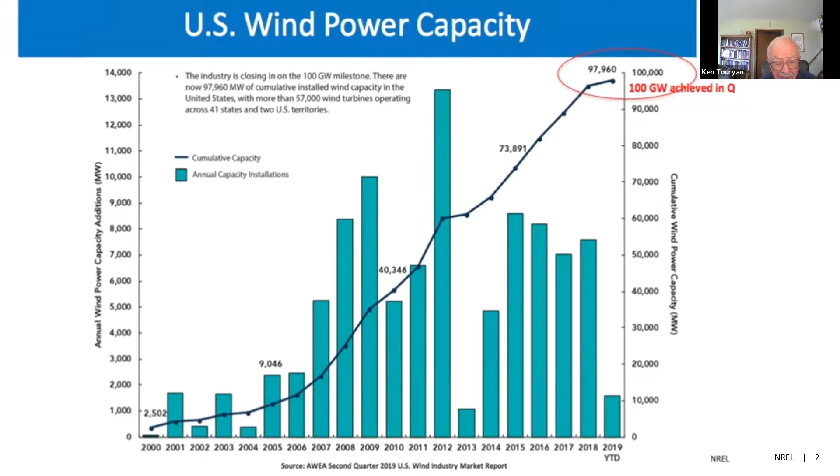In the following slide, I'll show you the vision that the Department of Energy has. The vision is wind energy could supply 20% of the US electrical demand by 2030. If you look at the lower left, it's right now 10%.

In fact, it is 10% in Colorado, our wind farms. But that's the vision toward which we're going, and it's accelerating so fast. I am sure we're going to even beat that by 2030.

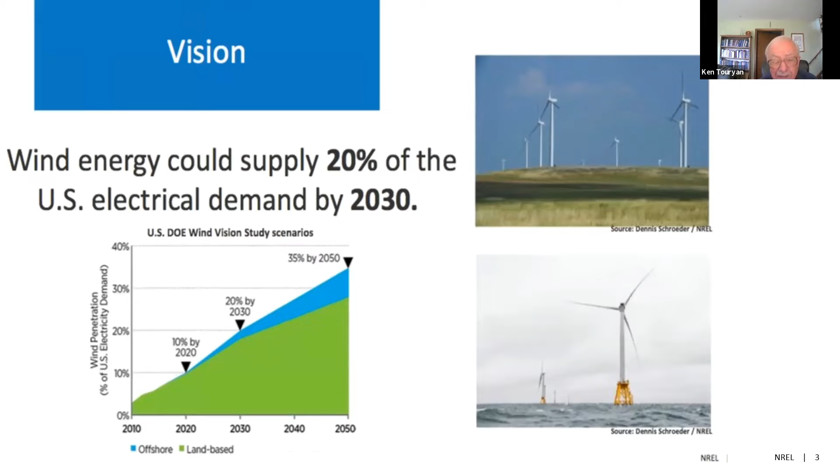On the next slide, we have the first offshore wind farm in the United States. The offshore is much more advanced in China than here. This is the very first one, which has been operating for 2 years. It is 5 6-megawatt turbines that provide enough power for 16,000 Rhode Island homes.

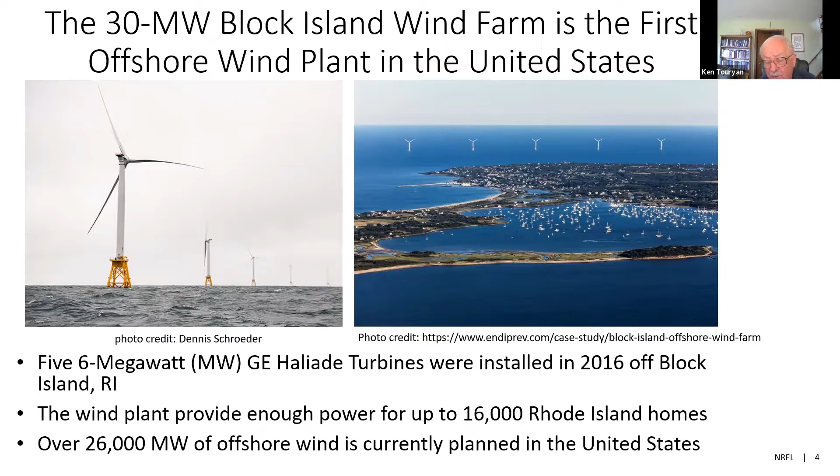This is in Rhode Island, and I'm going to show you what parts of the coastlines are best for wind farms. The next one being designed is in Maryland, the Delaware border, which will be 15 to 30 wind turbines, and it's just ongoing.

Okay, here is the very heart of the problem of wind farms in the ocean or in the sea. On the left-hand side, it shows you installed capacities of various countries. US isn't in there because we have only one so far. The fixed bottom is very simple. It's the floating that is the challenge. And there are 3 different types of floating systems, and I will come to that.

So far, 27,000 megawatts is installed in the fixed bottom, only 82 megawatts in the floating, and I'll describe to you a little more detail about those 3 floating techniques.

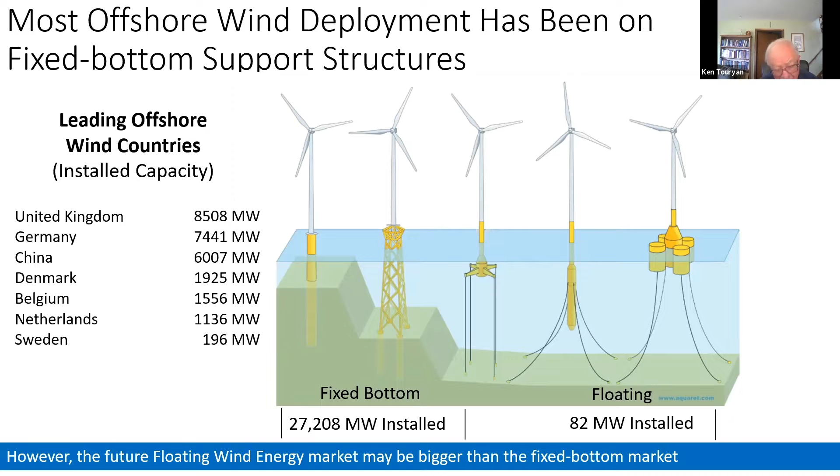Next slide, we will show the coastlines. There are quite a few coastlines throughout the world where you can go up to 60 meters. You don't go beyond that, it's too expensive. So unfortunately, 80% of offshore wind is past 60 meters, but there is enough that the floating systems can provide energy, especially by 2024. Incidentally, there's 57,000 turbines in the United States, but 90 to 95% of them are really onshore.

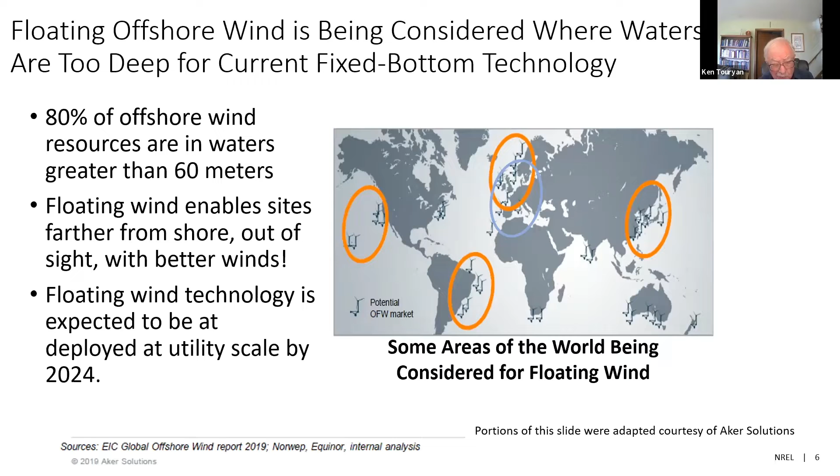Let's go to the next one. Here we will see the coastline for the United States. Notice that the northeast and the northwest are places where the wind is steady and high enough to make it cost effective. The key is 7 meters per second for wind turbine average, and then consistent wind that does not change much, and only offshore turbines can meet that criteria.

And then there's some in the south. The problem is you don't want to put wind farms where you can have typhoons or gigantic windstorms. It happens every now and then, but hopefully it will not be where you have a hurricane. So it's very important to keep that in mind.

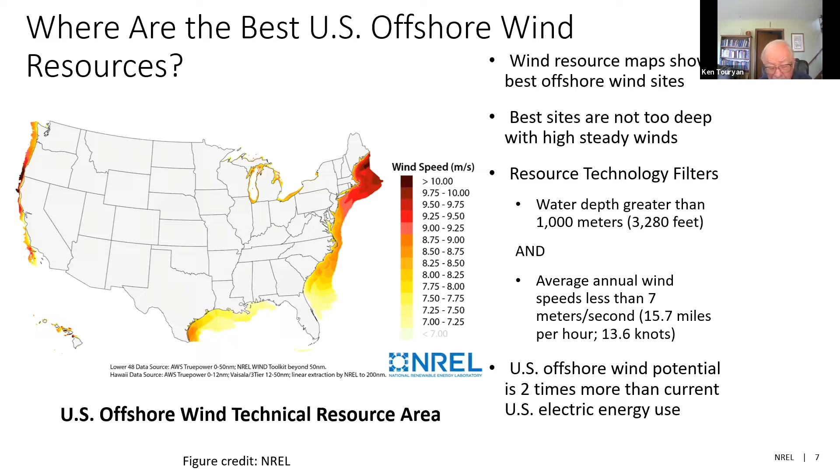All right, next slide. The very heart of the wind turbine is the blade. The lower one shows the 1980 blade. That was an airfoil. Okay, that has revolutionized now.

And we have very lightweight systems specifically for wind turbines. They're 90% lighter than the airfoil systems were. They have very interesting design features, which I don't have time to discuss, but I'll just mention a few things. In the Q&A, we can find out more.

The tip shape is tiny, and it's made like that to minimize noise, for example. The design and shape is specially done to reduce the torque of the blade, which in turn affects the generators inside the turbine nacelle. This one is the longest turbine blade that has been made, and it's all made of carbon fiber reinforced epoxy.

It is unfortunately not recyclable, because it is plastic-related. The most recent breakthrough has come, made up of vacuum-assisted forming of thermoplastic composites, which can be done in sections and then fused together. Fusion welding and adhesives are used.

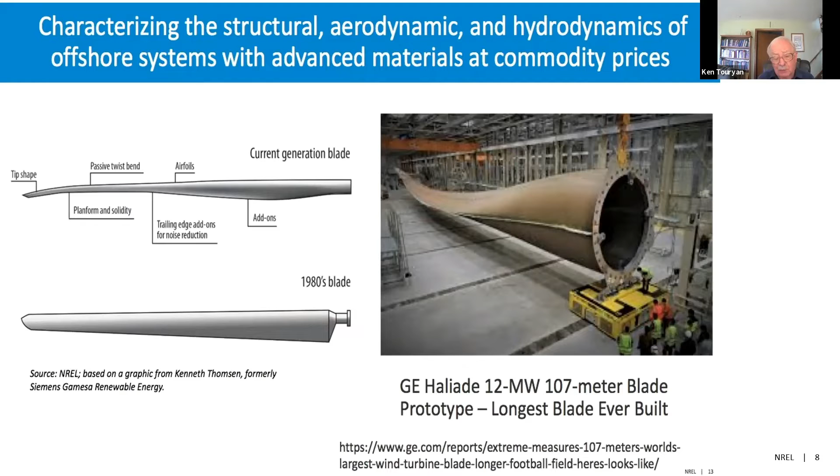They just tested it, and it looks good. And that's going to make the blade recyclable. There's a lot more information that I can give, but let's leave that for Q&A. Next slide is the heart of the installation.

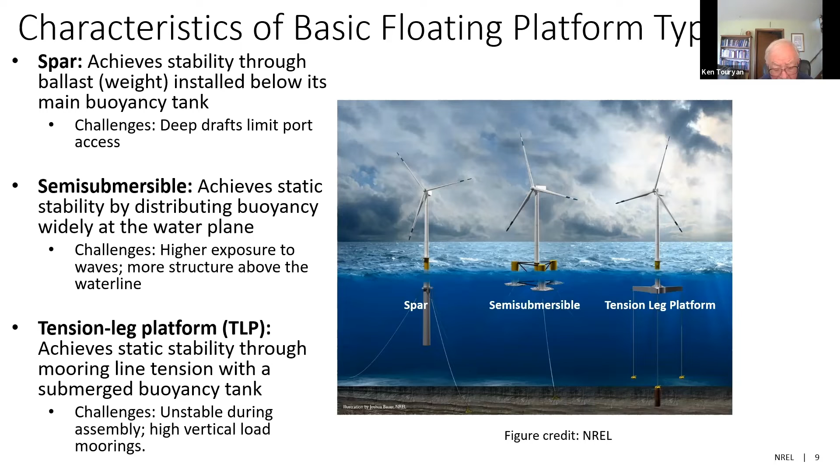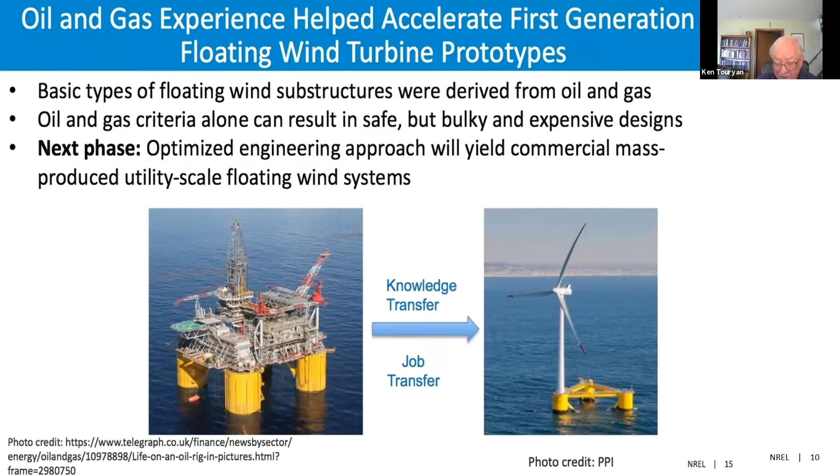In the next slide, we'll talk about a very interesting knowledge transfer from the oil and gas offshore rigs to the wind turbine, but it's limited because the wind turbine is top heavy, and you have a few different problems than the oil and gas system. Other than anchoring them, there's enough difference there, but it was a good start.

Next slide, I think we'll be looking at costs, which is very important. The turbine makes up only 24.3% of the total cost for a floating wind project. The blue side, you see, is also 26%. That is one of the biggest areas where cost can be lowered.

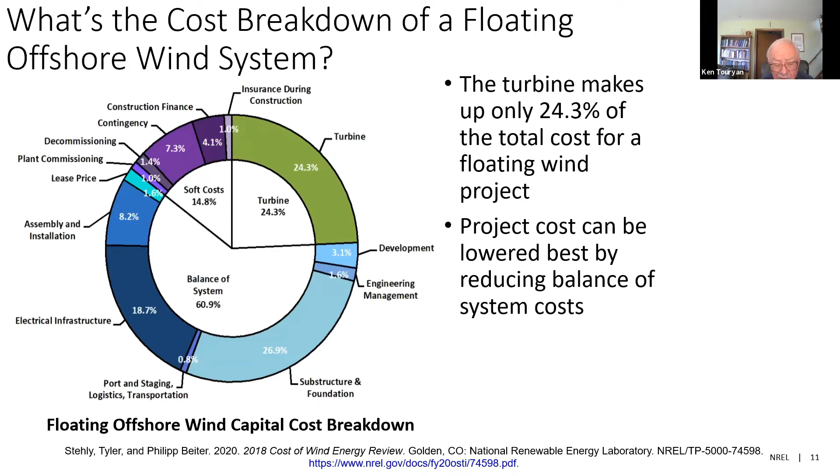That's where the installation is, the repairs are, moving the thing back and forth, and so on. That's where the biggest savings can be obtained as we learn more about how to install these in the sea, in the ocean. Next one.

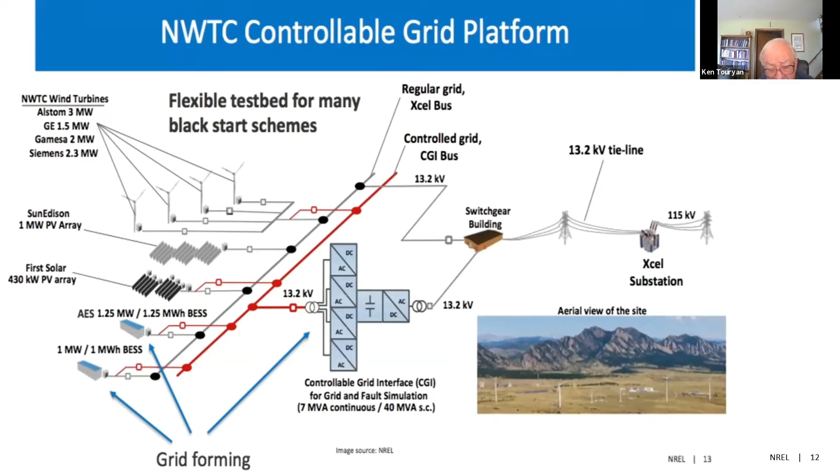Oh, I'm going to skip this. This is a very interesting platform NREL developed to help plan how you get a DC system, which is the output of a wind turbine, and connect it quickly to the grid. It's quite a technology to plan that. But let me skip that. Maybe we can recover that in the Q&A.

Floating operations and maintenance obviously is very important. If it is small repairs, as you see here, a tugboat can come, and then there is a lift that goes up and down in which small changes can be made. Some of these turbines are hollow, and you have an elevator in that, but that's expensive.

On the right-hand side, for major repairs, of course, you have a tugboat that has to come and a crane that will take off primarily the blades and also maybe the generators if something goes wrong, and bring it to shore. So that's where we have some of the interesting, more exciting problems.

In fact, I would suggest if you really want to know how they install these things and repair them, go to the internet. There you'll see some of the turbine manufacturers have a video for you to watch how they put this together.

When you erect these turbines, if it is less than 6 megawatts, it is done onshore and then carried by towed into place. If it is higher than that, then you need a special platform which the Chinese have developed.

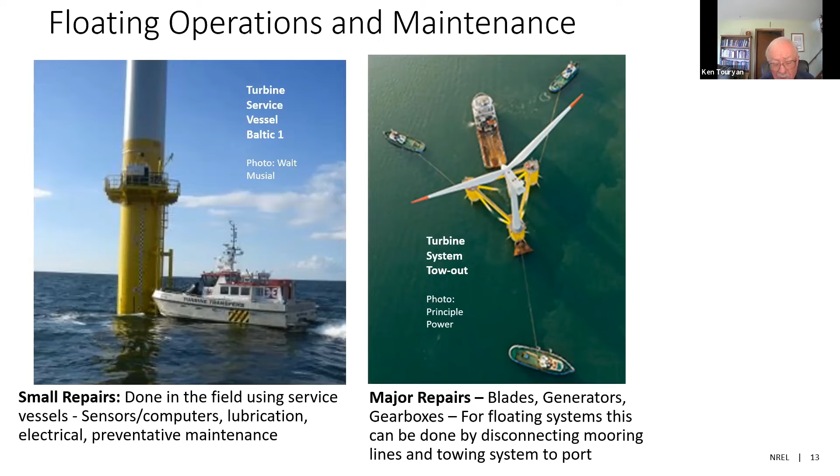And the bigger is important. I think in the next slide we'll see the direction it is going. At first, the cost, as you notice, it has to come from $200 per megawatt hour, it has to go down to 50. It is almost there. In fact, this whole curve has moved leftward as more and more improvements are being made.

So much so that there is no more need for subsidies for these turbines. It's really getting there now, and it's a wide open field for the use of it. In fact, it is estimated that by 2030 or 40, one third of the entire electric need of the globe can be supplied by offshore wind turbines. It's an immense number, but it looks very much within reach.

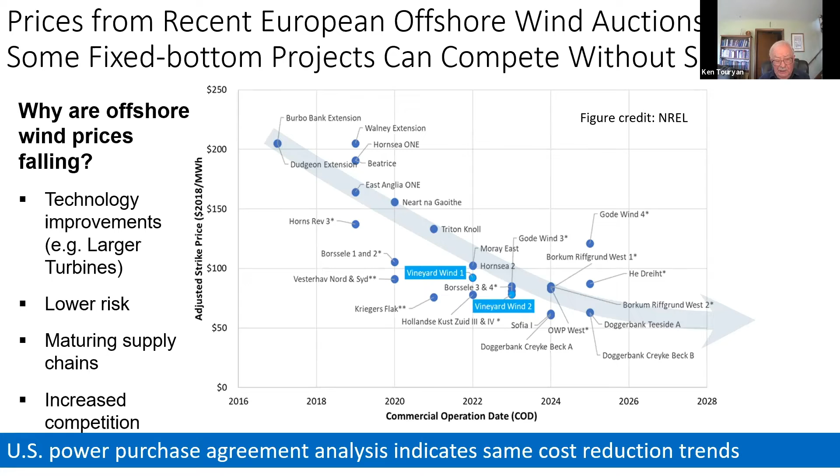In the next slide, I think we show that the turbines, technology improvements, lower risk, and so on. Look how it has evolved. Two minute warning. How much? Two minutes. Okay, I'm just about done.

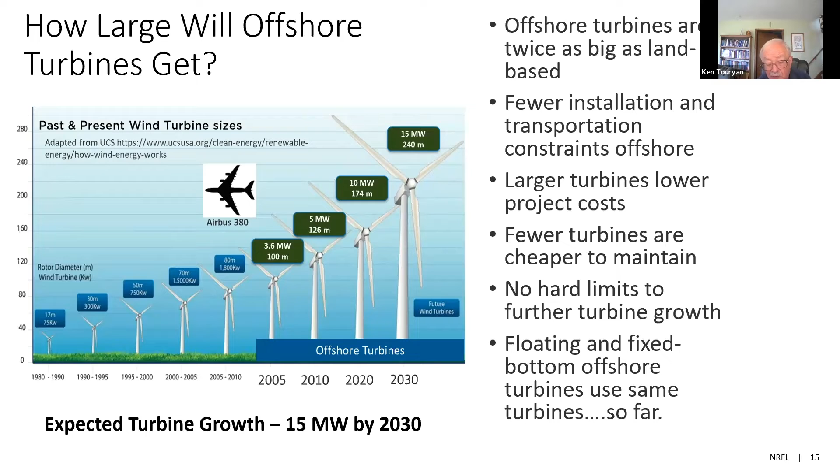The very small ones at 75 kilowatts, and now we're talking of 10 megawatt unit turbines. Look at the largest airplane and the size of these turbines. The bigger they are, the cheaper it is to operate as a farm, but also the more difficult it is to install. But that's the direction things are going. Fewer installations, larger turbines are very important. No hard limits to the size of the turbine at this point.

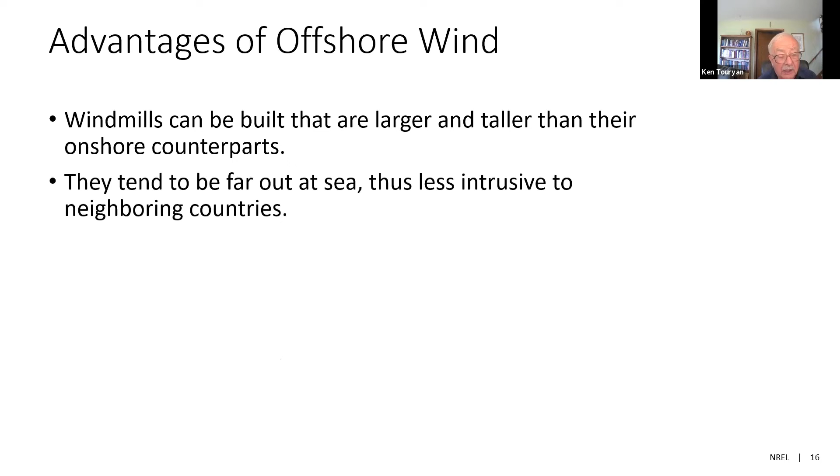And next one is the advantages, the heart of what I have prepared. Advantages of offshore: windmills can be built that are larger and taller than their onshore counterparts. They tend to be far out at sea, thus less intrusive to neighboring countries. Typically out at sea there is much higher wind, steady, higher than 7 meters per second, steady year-round.

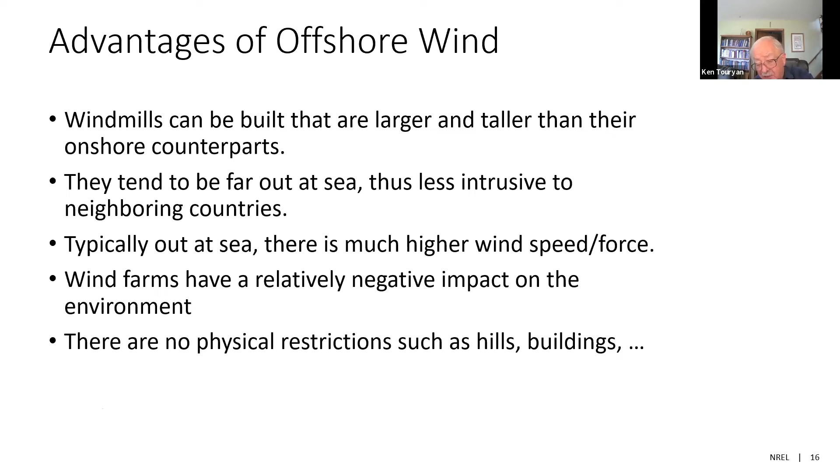Wind farms have a relatively low impact on the environment. Next slide. There are no physical obstacles. That's what's great about having a smooth ocean or a sea with wind turbines.

Disadvantages offshore: the biggest disadvantage of offshore is its cost compared to onshore, because onshore is easier. The effect of offshore wind farms on marine life and bird migration has not been determined yet. Especially bird migrations should be very carefully considered when a large wind farm is built. Some of these wind farms have 150 turbines, the Chinese have one with 150 turbines. And incidentally, because they're intermittent, the large size uses averaging, so you don't have a constant interruption because of wind.

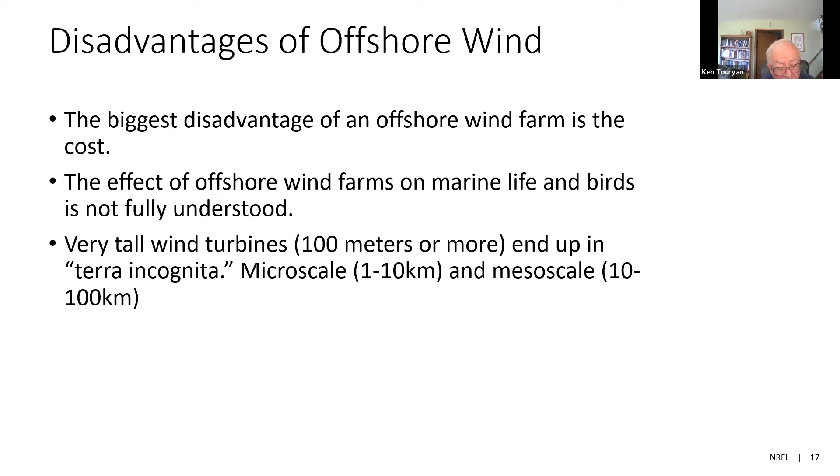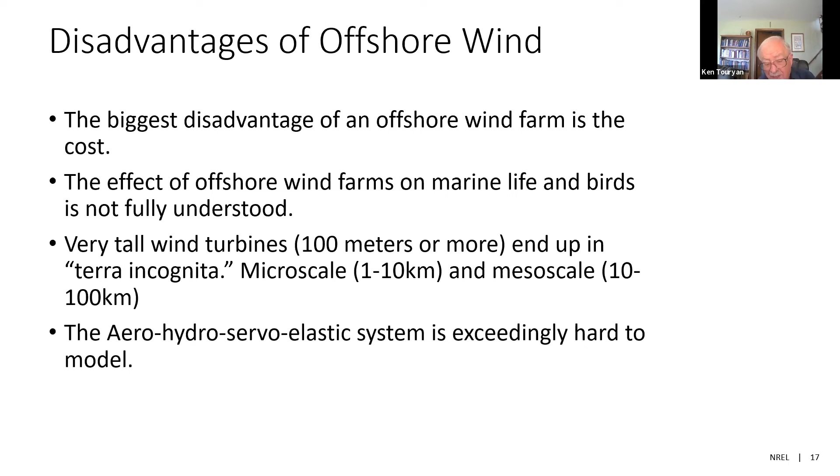Okay, the disadvantage of offshore wind, the biggest disadvantage is, of course, cost. The last one is very tall wind turbines actually enter different wind domains, one is micro scale, one is mesoscale, and the wind patterns are very different. The most exciting part for me is that this requires aero, hydro, servo-elastic modeling, and it's exceedingly hard to model. This is why entire departments now are devoted to wind turbines.

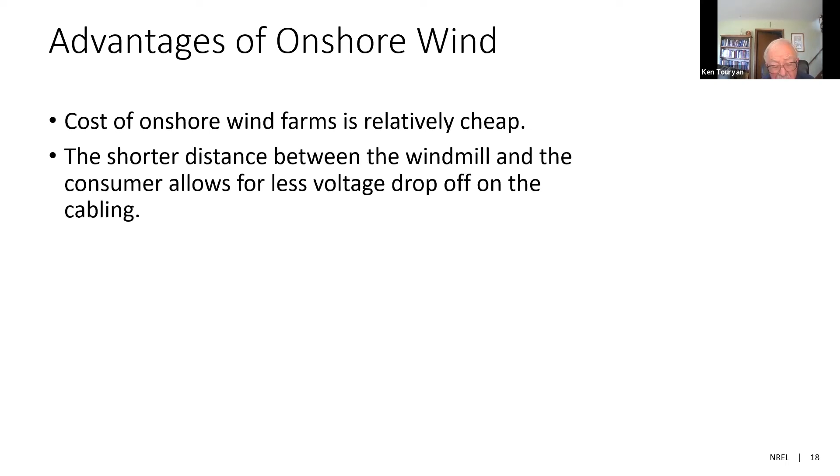Next one is onshore, and we'll finish with that. Onshore advantage is that it's cheap, low cost. Next, distances between turbines and consumers can be made shorter, thus saving the voltage drop. Wind turbine installation is very quick, you can do it in half a day, even the big ones.

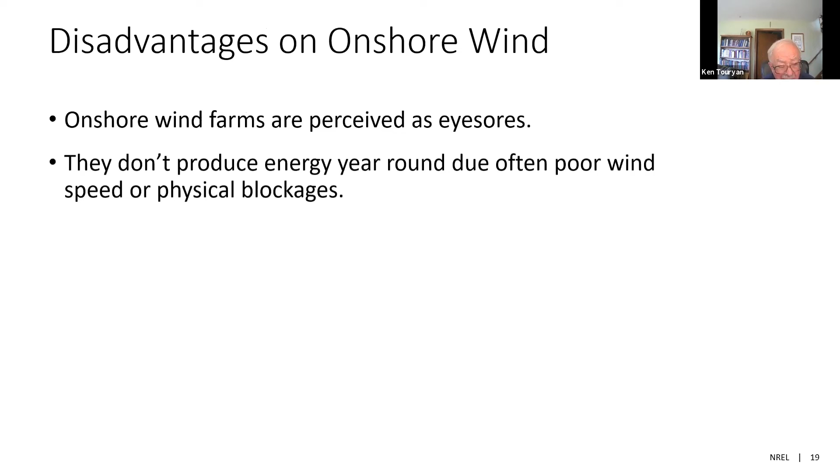Advantages and disadvantages: onshore turbines are perceived as eyesores, the 'not in my backyard' type thing. They don't produce energy year-round because of poor wind speed and physical blockages, and so on.

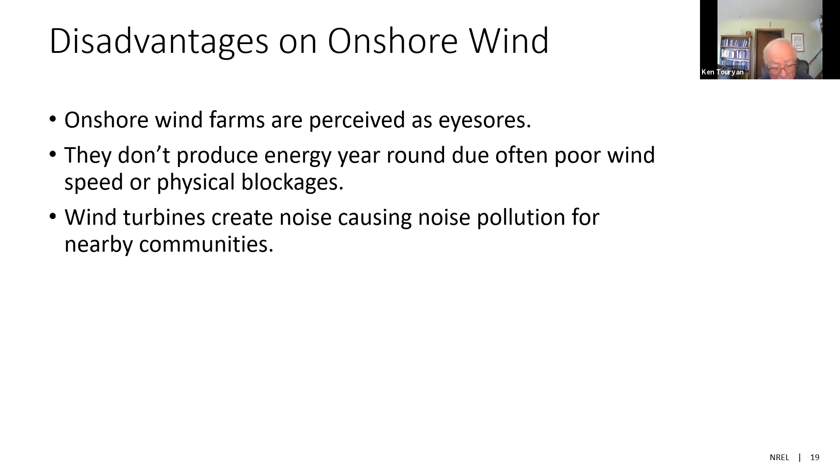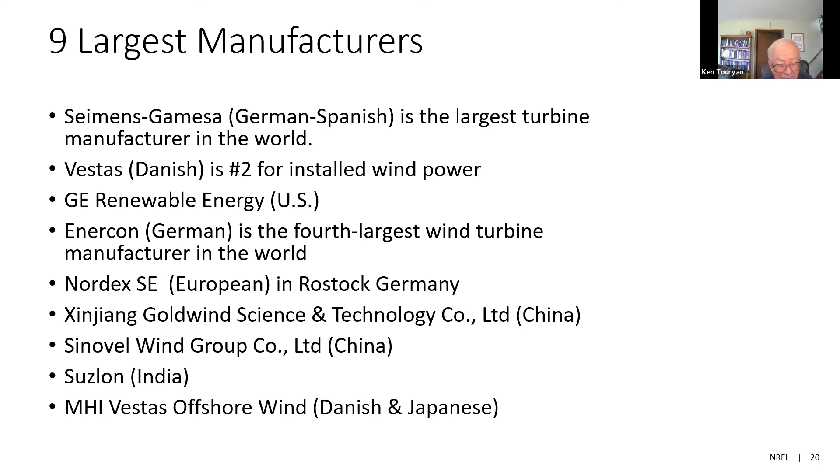I see, Jack, you have your hand raised. Yes, I can't resist. Ken, as you know, the Western states are in a mega drought, which has every indication of being a recurring phenomenon. We're out of water in California for agriculture, for example, not to mention our leisure. And it occurs to me that an offshore wind platform to desalinate water might just be a unique solution. It's going to be very hard to put desalination plants on our seacoast because it's considered such a precious visual stimulation. Are there platforms big enough to put a large-scale desalination plant out to sea?